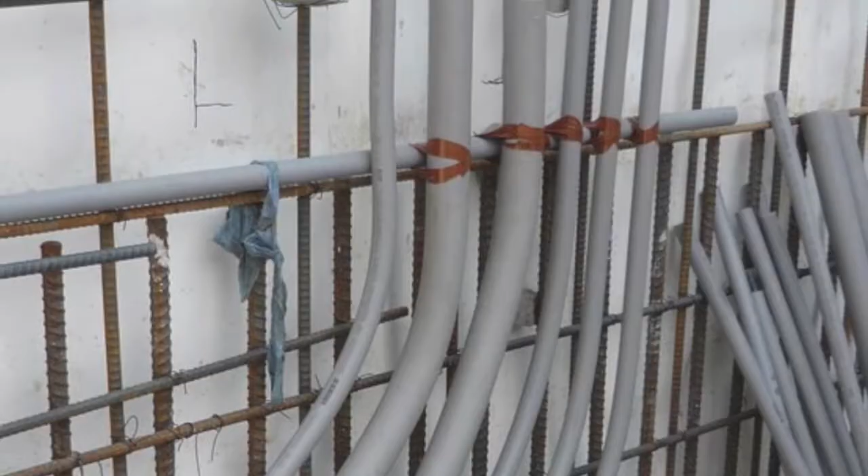CTA Traction Power System Upgrades is a public infrastructure improvement project for the Chicago Transit Authority, the bureau in charge of all bus and train lines in the city. It is a multi-part project consisting of 3 separate electrical substations, along with 27 column footing replacements and other miscellaneous electrical improvements. The project is needed to improve electrical power flow to the CTA elevated tracks for both the Brown and Red Line trains, which serve over 350,000 people daily.

The project is a design, bid, build contract totaling $47 million, 17 of which is for electrical scope. Each substation is located along the CTA Red Line on the north side of Chicago. Since all 3 substations share similar characteristics, we chose to examine one particular building along with the footing replacements. Our project is located in Chicago, Illinois at 945 West Armitage Street in the Lincoln Park neighborhood. We will refer to it as Armitage.

The project management structure is the following. The project owner is the Chicago Transit Authority, or CTA. Architect of record is Larimore, Douglas, and Popham Incorporated. Construction manager is STV Inc. General contractor is FH Paschen SN Nielsen. Along with these 4 major players, there are 13 subcontractors performing all trades except concrete, which will be self-performed by FH Paschen. FH Paschen is a general contractor based in Chicago, Illinois. They have performed several projects for the CTA, including a $49 million station rehab currently in progress.

Our contact for this project was Jim Brick, the project superintendent. The past 10 years he's been with FHP. He has done 6 CTA station rehabs and 1 entirely new station on his most recently completed project, located at Morgan and Lake Street, Chicago's West Loop. Along with Jim, the FHP project team consists of a project manager, 2 project engineers, and an office manager.

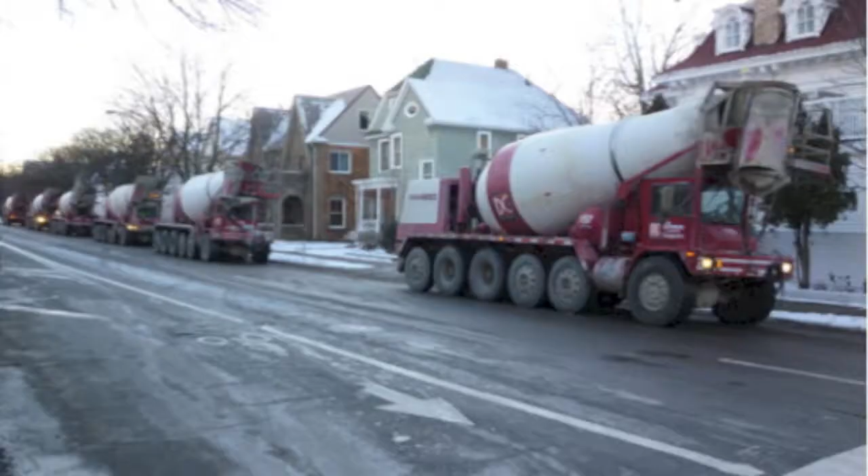There are numerous challenges for this project, both small and large. The first challenge the construction team must deal with is the location of the project. Lincoln Park, home to over 65,000 residents, is a densely populated neighborhood located on the north side of the city. Working in such a populated area creates challenges in material and equipment deliveries. In such a congested area, there is nowhere for trucks to wait without disrupting the daily operations of nearby stores and residents. This means the superintendent and subcontractor must be continuously coordinating orders with their material suppliers so there's not a cluster of vehicles reaching the site at the same time.

Laborers and flaggers need to back trucks in swiftly in order to avoid problems with the area's residents. The trucks were constantly blocking the street. Residents would put in complaints to the city, which would cause problems for FHP. The second challenge of this project is the size of the site. It is an extremely small site with almost no room for staging. There is also minimal room to maneuver trucks and equipment due to the columns from the elevated structure and its generally low height.

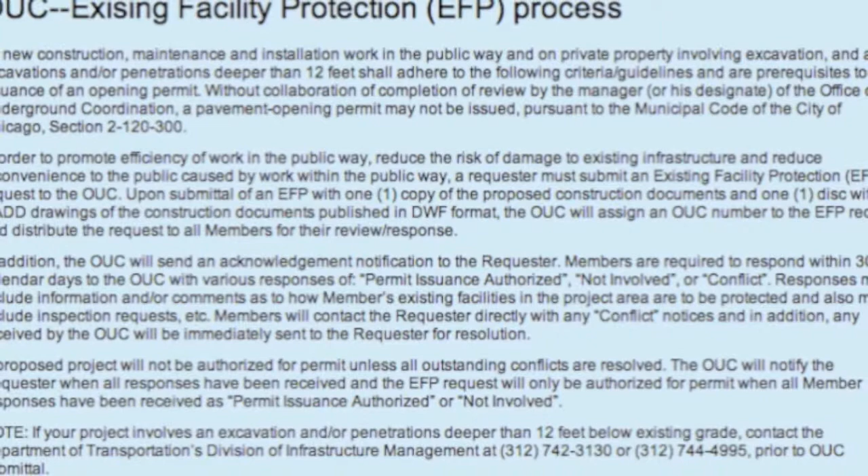Permit issues have caused the start of the project to be delayed. When applying for their building permits from the Chicago Department of Buildings, FH Paschen did not clearly indicate that they would have earth retention structures exceeding 12 feet below grade. Projects with earth retention structures exceeding 12 feet below grade require an existing facilities protection review from the Office of Underground Coordination. FH Paschen was originally under the impression that they did not need an existing facilities protection review, and so they did not plan accordingly. This review lasts 30 days, and all construction activities have to be delayed while it is taking place. The total duration for the project is projected to be just under 2 years.

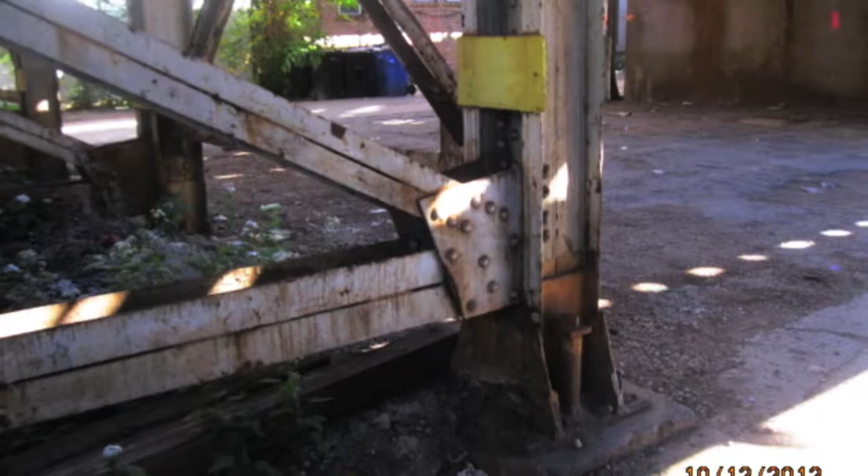Prior to starting the demolition of the substation, the planning process should include an engineering survey of the location. A structural engineer must also assess the condition of the framing, floors, and walls to look for the possibility of an unexpected collapse. Before demolition, all utilities must be disconnected from the building. Since the job site area is very limited, all demolition material must be removed from the site as quickly as possible. Any leftover debris can also pose a fire hazard, which would not be in compliance with the CTA safety specification. In addition, the demolition material must be kept away from the railroad's right-of-way since the train will continue to run during the duration of the project.

FH Paschen has developed many different procedures to help keep the job site safe and secure. To prevent robbery, FH Paschen will place burglar alarms and motion detectors on their trailer. Their containers and cargo boxes will also have padlocks and padlock shields. Since materials will be kept overnight, the job site will be under 24-hour surveillance.

Finally, the safety management program suggests that copper wire be painted black to keep thieves from spotting it on the job. Because the CTA project is in close proximity to urban areas, schools, and residential and commercial businesses, there are many procedures aimed toward protecting the public.

An 8-foot chain-link fence with green screening will be placed around the job site. This fencing may not be substantial enough to prevent debris from leaving the job site. Because of this, hoardings and other physical barriers will need to be erected during construction activities that produce debris. One example is using Hessian screens around welding locations.

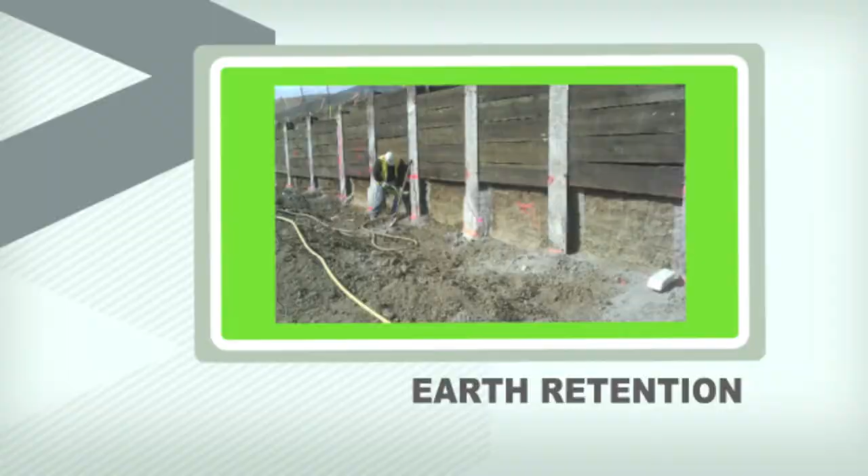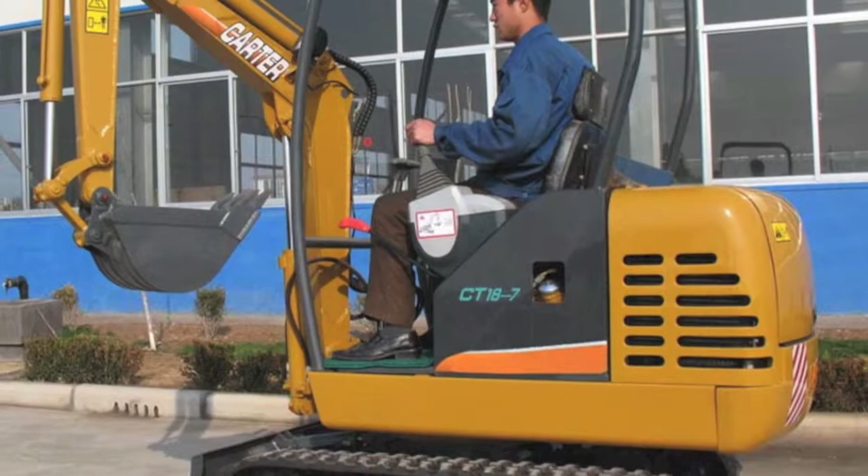The excavation is subcontracted to Stallworth Underground. The excavation will allow replacement of column footings and the construction of the cable vaults. The wedding cake foundation is replaced with spread footing. One problem is that the train tracks are low. Because of this, a mini excavator has to be used for digging.

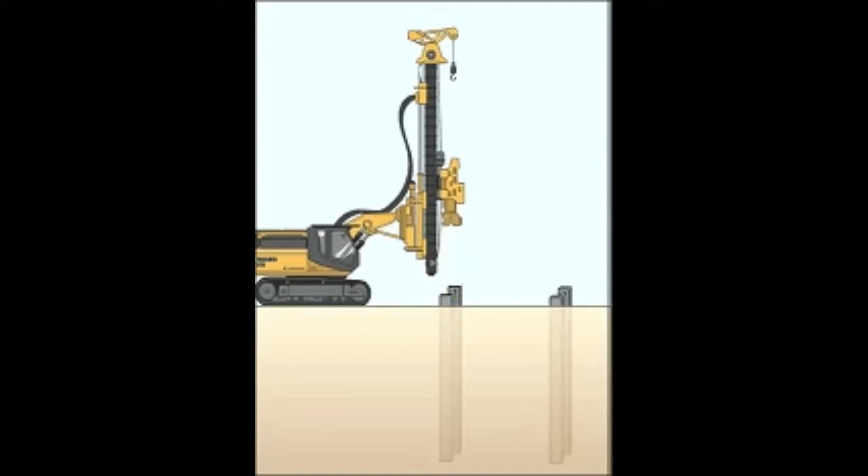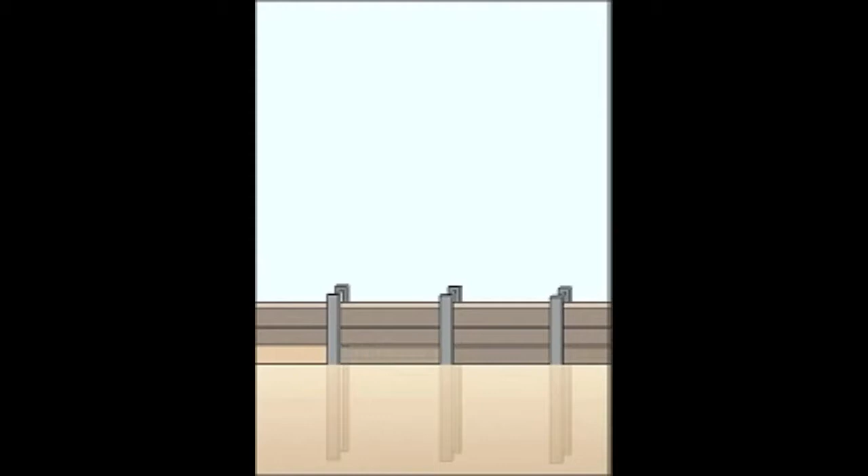Also, a vibrating hammer is attached to the mini excavator instead of a bucket in order to grab the piles and drive them into the ground. Earth retention is necessary in order to install the proposed footings. The subcontractor is also responsible for designing all struts, walers, H-piling, and laggings.

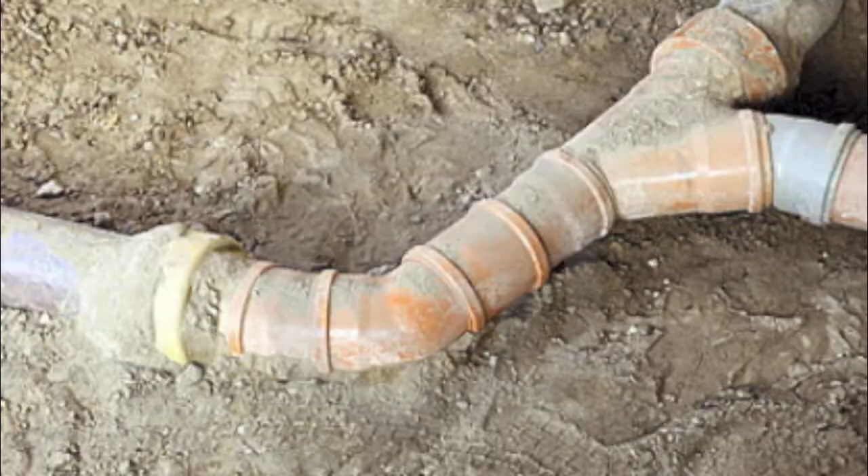The excavation process will also involve a dewatering phase to prevent the softening of foundation bottoms. Since the project is performed on an active train line, temporary shoring is essential. The columns are temporarily supported by girders attached by C-channels and I-beams. One last responsibility of the subcontractor is to locate the existing utilities before excavation and make sure they're supported during the whole process.

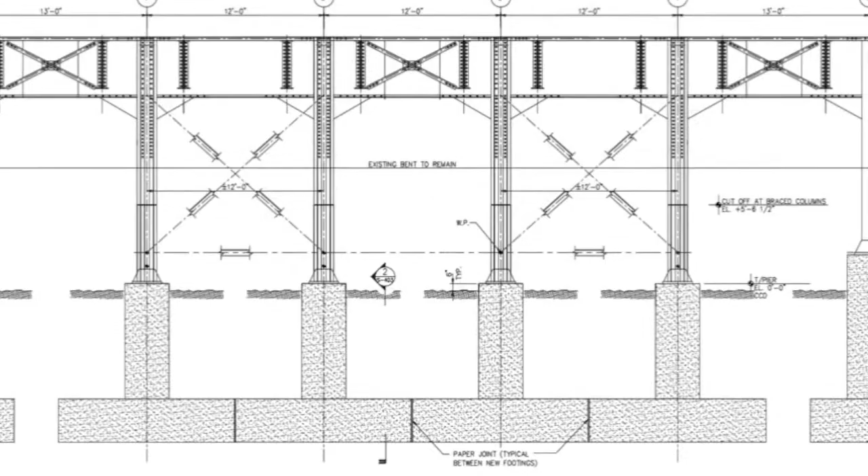All the foundation of the cable vault will be constructed out of concrete, which will be self-performed by FH Paschen. However, cable vault construction cannot start until the track foundation and piers are complete, which will also be made of concrete. The concrete scope of this project includes the 27 column footings, the mat slab and foundation wall for the electrical substation, exterior equipment pads, and cable vault roofs.

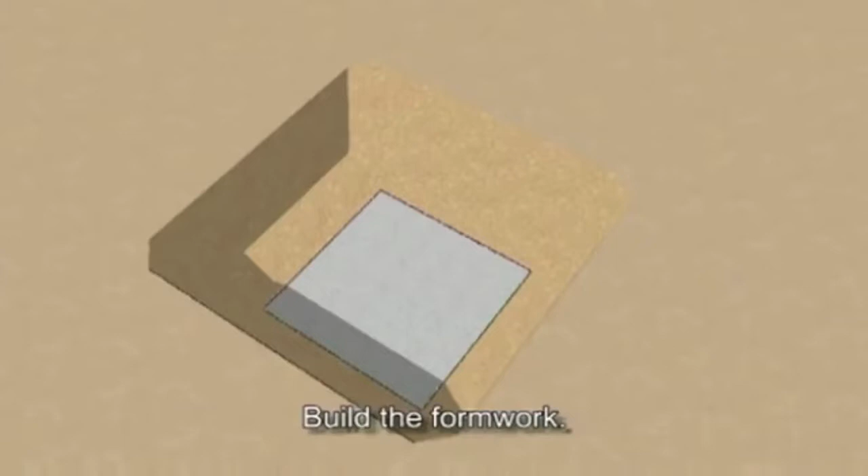After soldier pile walls are up and the demolition of the old foundation is done, they're going to pour a lean layer of concrete underneath, then put formwork on top, put some spacer blocks, add reinforcement bars, add more reinforcement bars, and add reinforcement bars for the stump, add more ties to the formwork, and pour some concrete and voila!

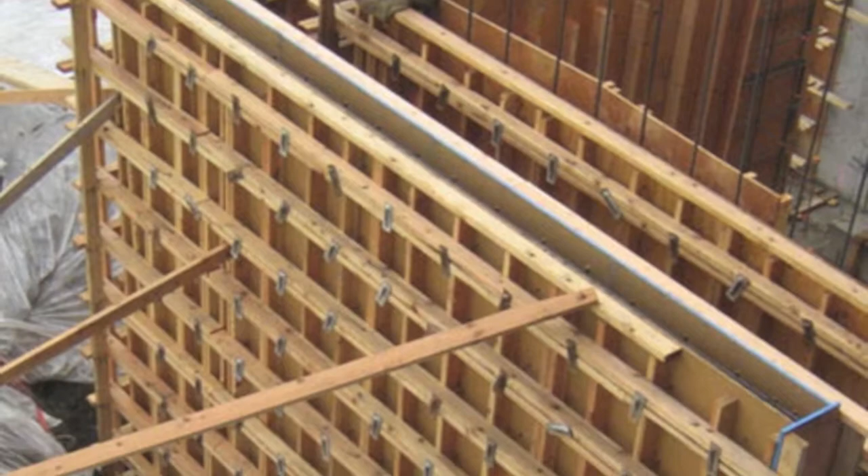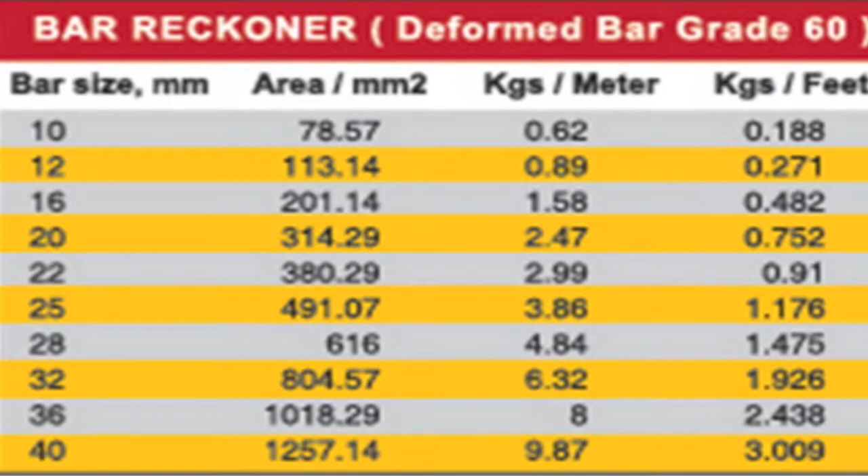Cast-in-place concrete will be used for this construction, using simple plywoods with resin coatings and non-exposed cone-type form ties. Reinforcement will be used in every place where cast-in-place concrete is used. The reinforcement bars will consist of grade 60 deformed bars. The rebars will be assembled on site.

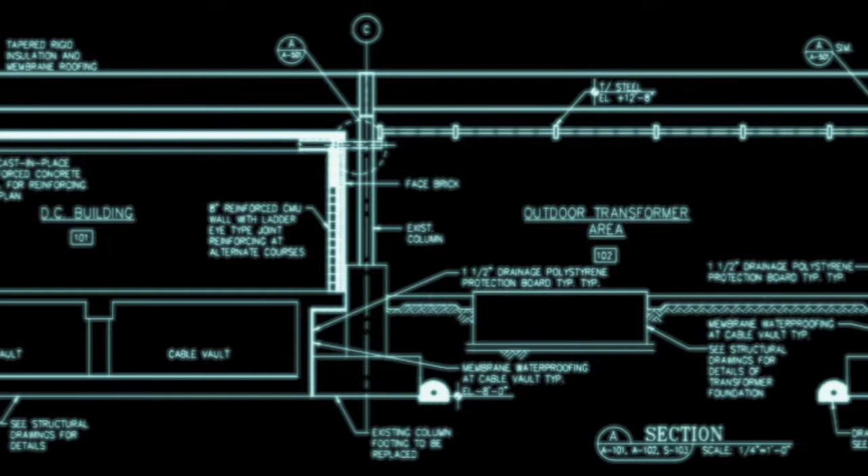After the foundation for the tracks is done, they'll start working on the foundation for the cable vault. The form will be removed after the concrete has reached 70% of its design strength. The finished foundation should look like this. And that is the end of the foundation.

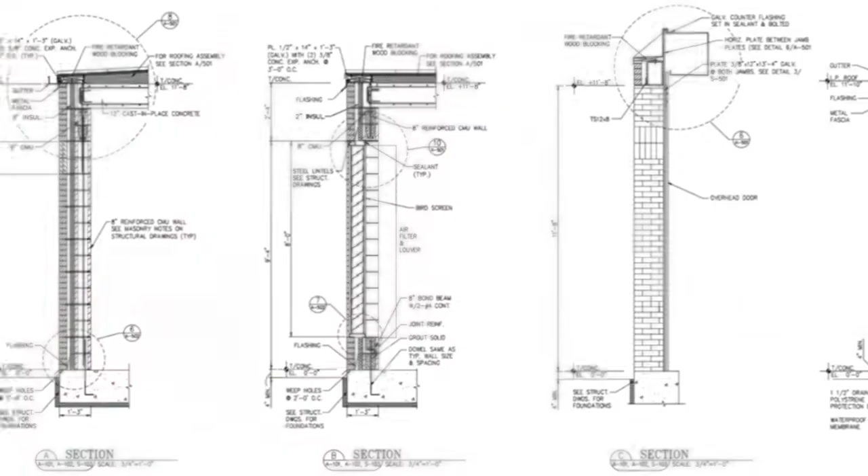Once concrete is poured, masonry can begin. Since this project is heavily electrical, the mason will have to work with the electrician to organize wall cutouts for conduit. The masonry subcontractor for Armitage is Garth Construction Services. The scope on this project is quite simple, consisting of 8-inch CMU walls veneered with standard, modular-sized face brick.

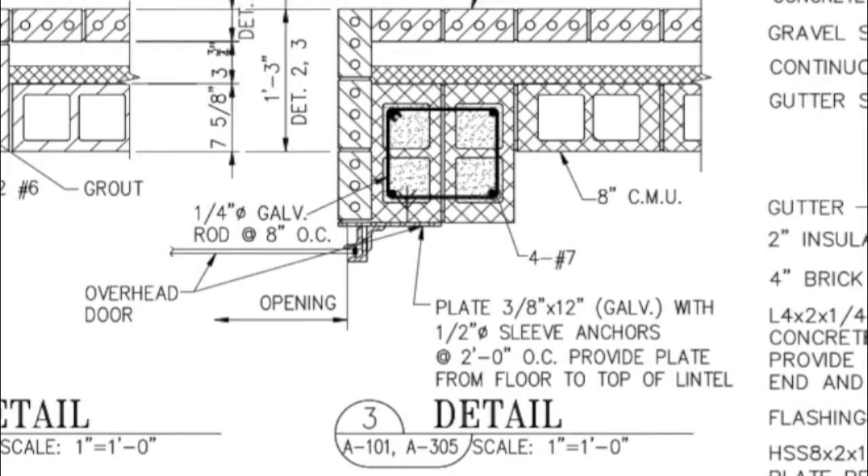Face brick is a running bond with 2 soldier courses located 8 feet up on the wall. Joints are to be tooled concave and are to be reinforced for every second CMU course. Overhead door openings will be spanned by tubular steel beams, while personnel entrances will consist of solid grouted hollow metal door frames spanned by bond beams. All masonry walls are to be grouted solid and reinforced with half-inch rebar.

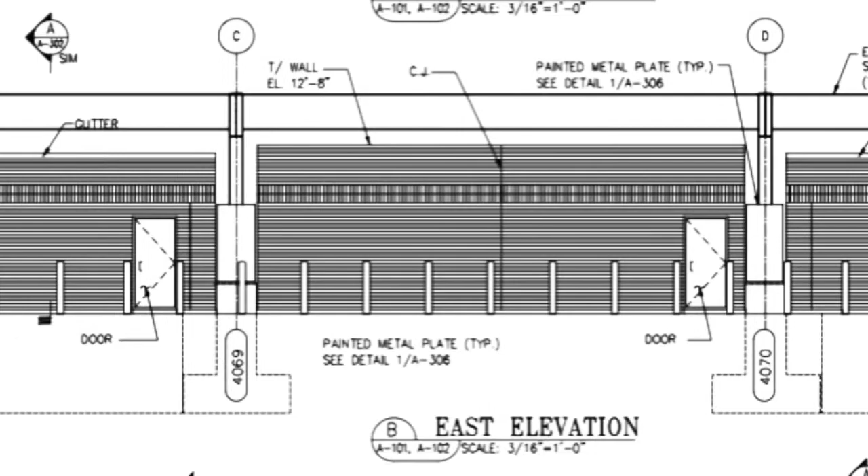Along with masonry, the steel scope for this project is relatively simple and repetitive. The majority of the steel construction consists of installation of new connections between the elevated structure's columns and the new concrete footings. Also in the steel scope is a chain link fence covering the courtyard between the AC and DC cable vault. The steel erector on this project is Metropolitan Steel, and the fabricator is Web Production Framing.

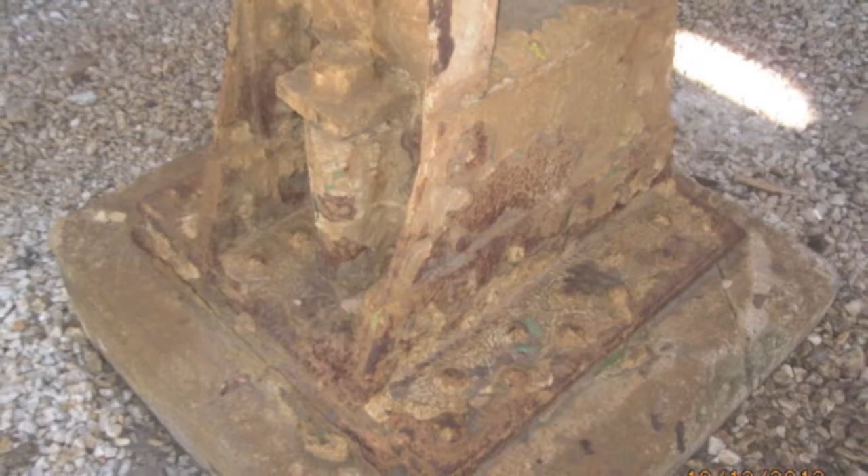Many of the old column bases are dilapidated and rusty and need replacement. After the footing is poured and ready to connect to the new column, Metropolitan must drill holes into the existing columns to attach the plates and bolts securely to the new base.

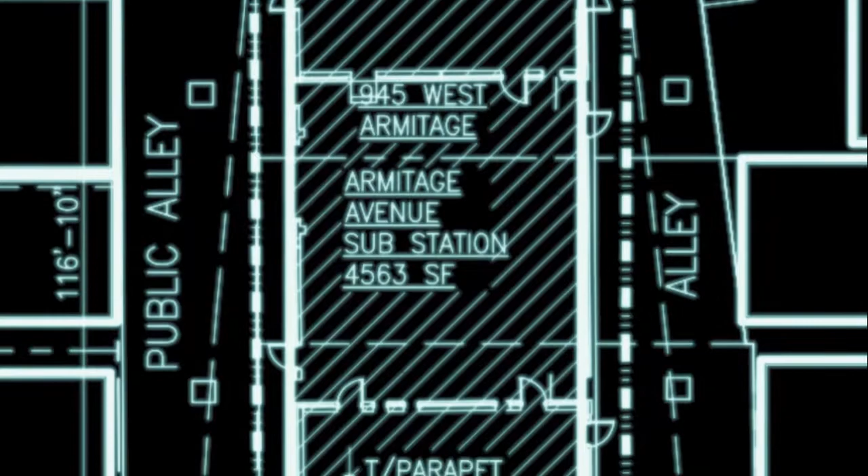After all this work is complete, the electrician will arrive on site to install electrical conduits, power distributor, AC-DC converter, and other electrical works we will not cover in this project since they are out of our scope. But here is the drawing of what the finished structure should look like. Enjoy!